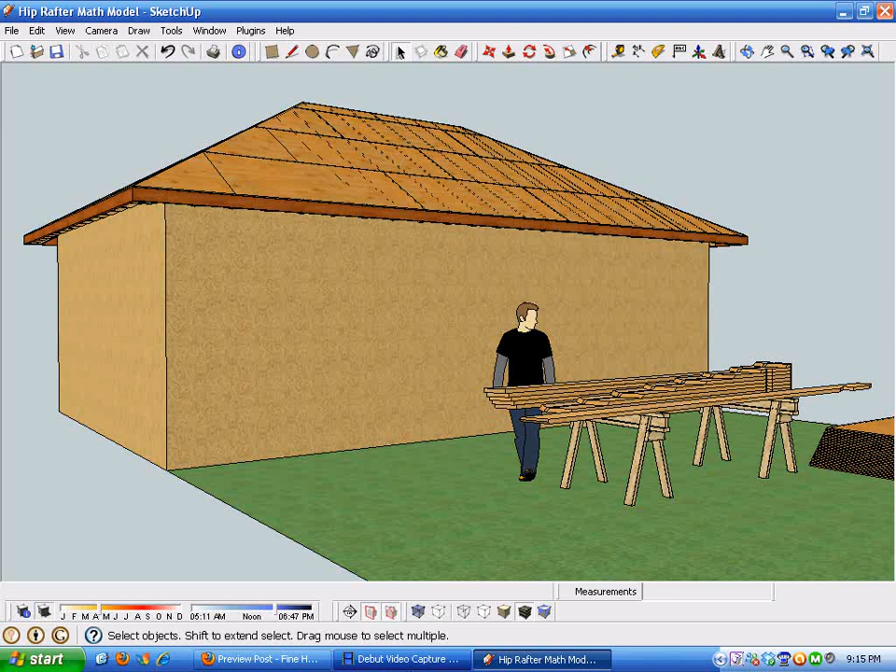In response to viewer interest in my rafter math videos and blog post at finehomebuilding.com on the digital job site, gauged by the view count, and to address a comment on the rafter topic from that video, I developed a three-part video and blog post series to explore hip roof framing a little deeper. I titled the first of the three videos Demystifying Hip Roof Framing with SketchUp, where I'll cover hip rafter geometry in general.

And explain the term 'dropping the hip' in specific. Some of you might have heard that term. If you don't understand it, I'm going to try to explain it. This is a way to visualize it, or maybe clarify it a little bit.

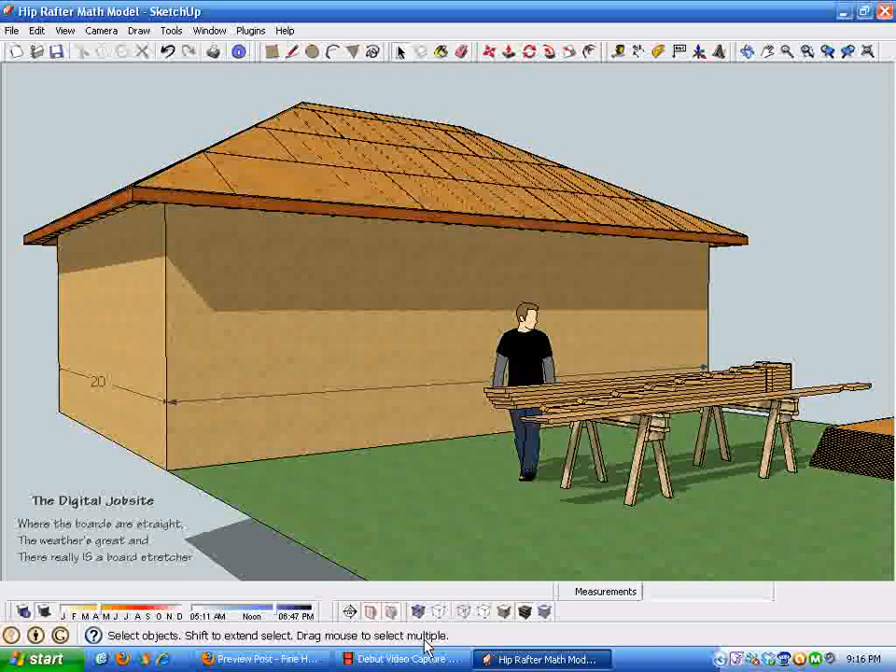To do this, I created the model you're looking at here, which is just a conventional framed hip roof. I drew this in a 7/12 pitch. I'll turn off the shadows as we explore here. And got Bryce standing by a set of sawhorses with components that are used for typical hip roof framing.

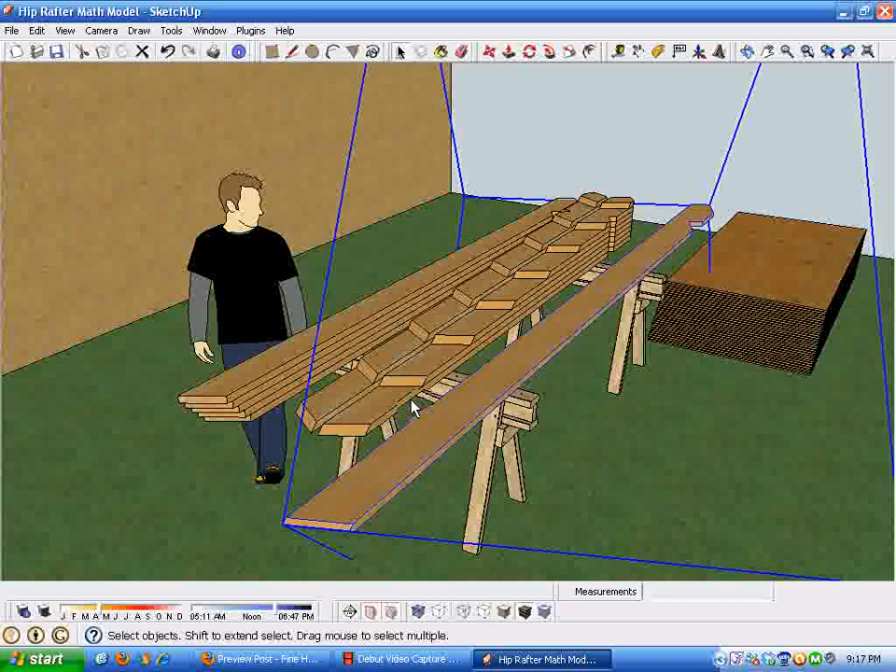In this instance, I've got common rafters, and then two sets of hip jack rafters, a left and a right, and then a hip rafter proper. Then all I did was make copies of the components that I drew to create the roof, and just orbited them around and laid them on the sawhorses. But that's what a hip roof package, part of it, looks like anyways.

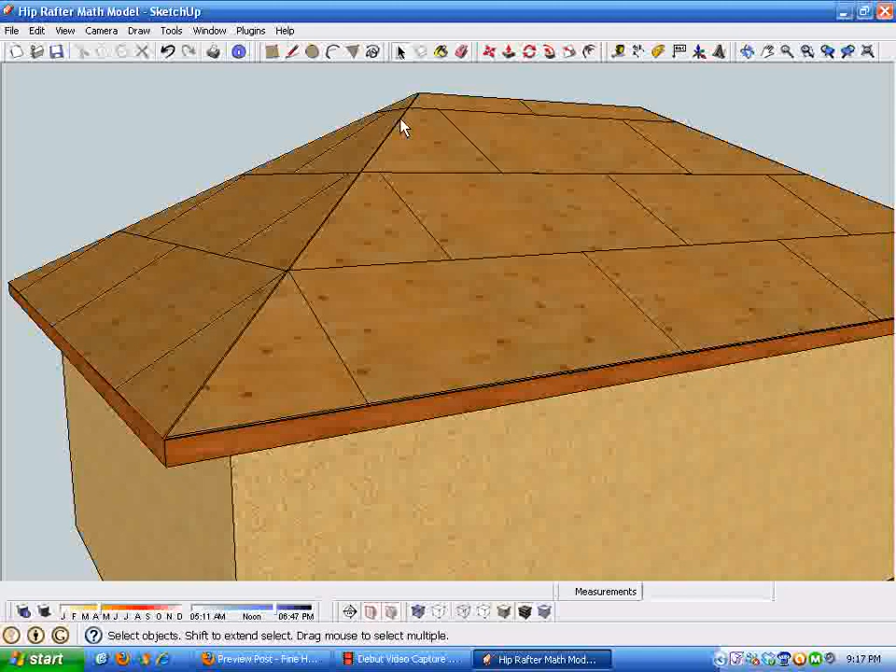So the important thing in my mind when talking about framing a hip roof is to make sure that the roof planes are flat and that they intersect in true straight lines. If you eyeball up the hip here from bottom to top, that's straight as an arrow. Each of the roof planes here are flat.

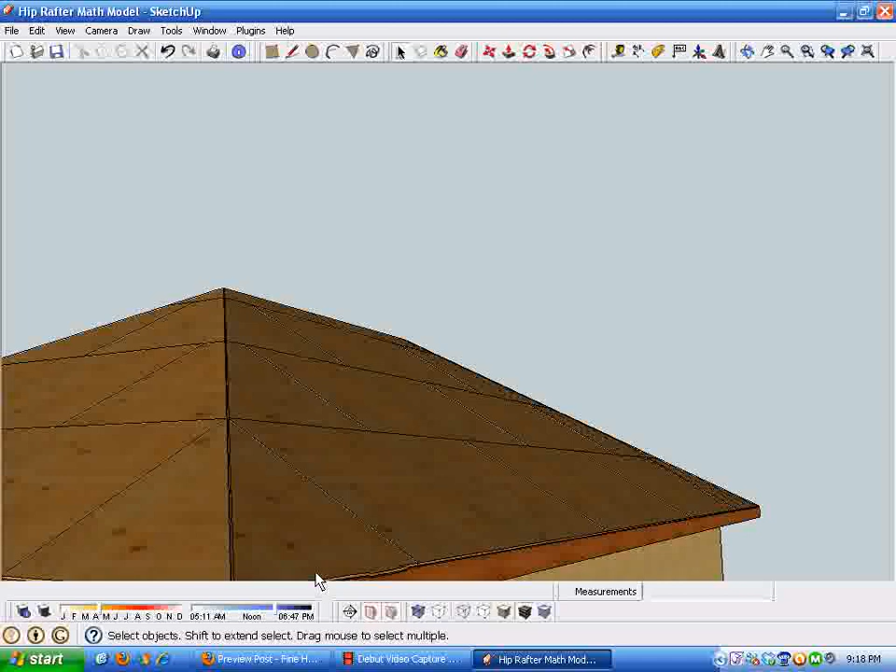Of course, this is a lot easier to do in the digital world at the digital job site than it is in real life, where rafters have crowns in them, and there's some variance there. But the idea is to strive for this flat roof without the hip being bowed up or bowed down anywhere along its length, or at the overhang, or in between.

So that's ultimately the goal of a well-framed hip roof, is to have flat intersecting roof planes that intersect in a straight line. And to peel back this onion a little bit, I set the model up with some layers.

Which I can get to with this layers dialog box. And I grouped this stuff in a couple different areas to be able to layer it on and layer it off and visualize some of the things I'm talking about here.

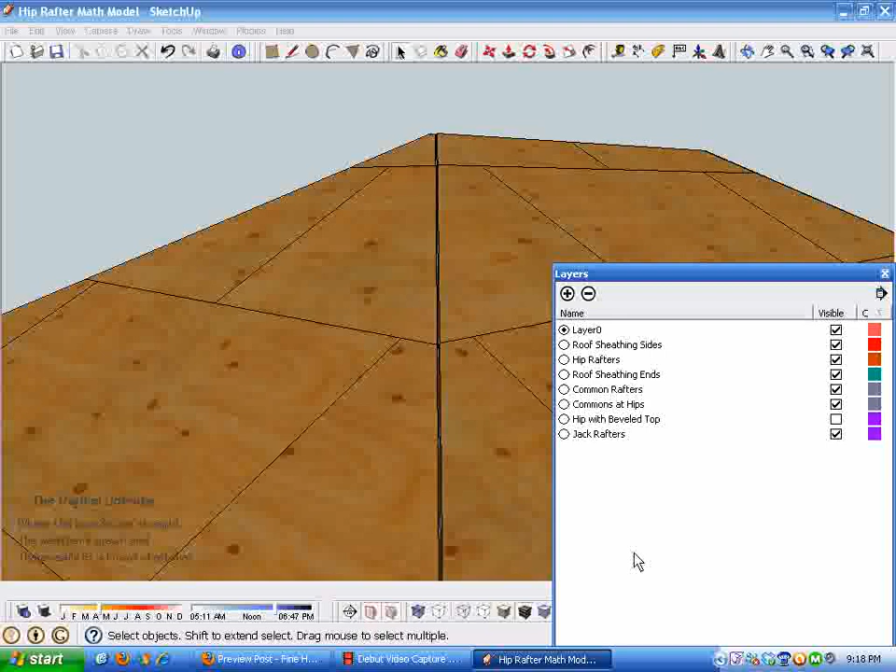So I'm going to hide the roof sheathing at the ends. You can see how that then opens up the roof. There's one common rafter in the middle, and then two sets of hip jack rafters, one on each side of this. And then the jack rafters are tied into the hip.

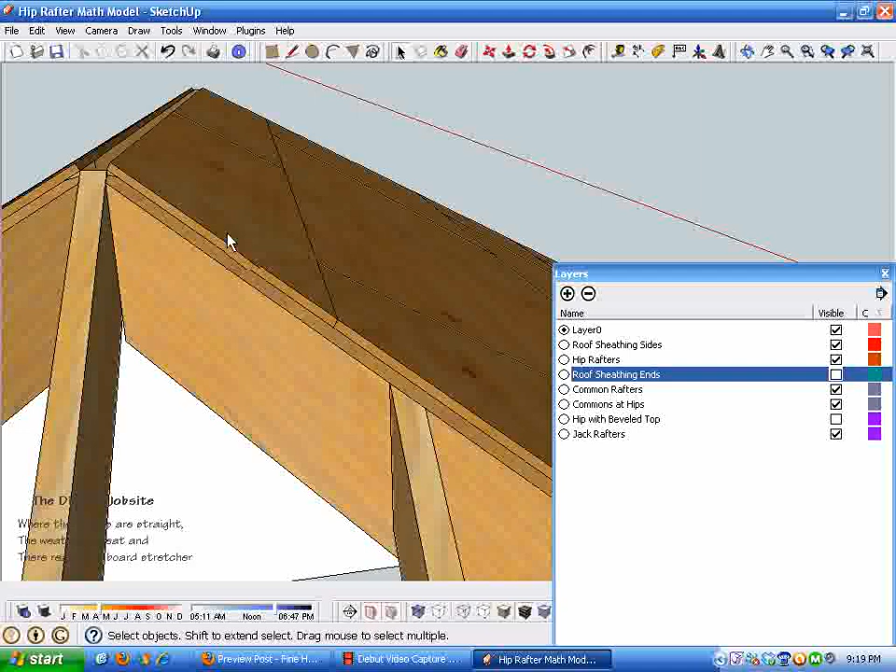And the plywood, I drew the plywood in the model with a 1/2 inch thickness to get the full effect. You can see how the bottom of the plywood is what's laying on the rafters. Let's see if I can orbit around underneath here. Bottom of the plywood's laying on the rafters, and it lays on one edge of the hip.

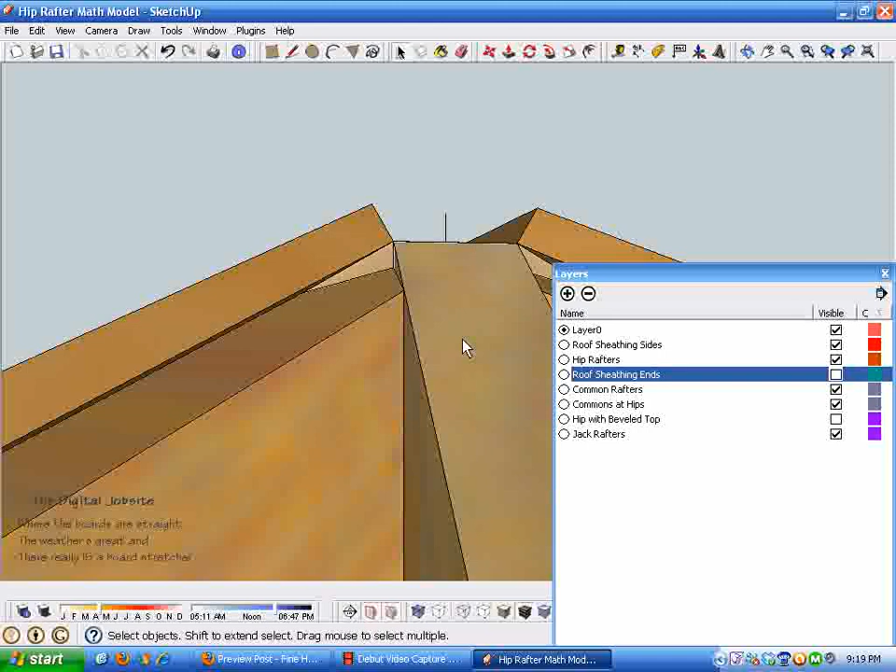If you zoom in here, you can see how the hip rafter is flat and the plywood is supported right here by the edge of the hip rafter. So it's that edge of the hip that needs to be coplanar with the top surfaces of the common and jack rafters. That's getting into a little bit of detail there.

But to go a little further into this, I'll hide the sheathing on the sides. And now you can see, hide this dialog box, the rafters are all coplanar with each other, the top surface of the rafter and this corner of the hip. I'll try to explain that a little further to understand it.

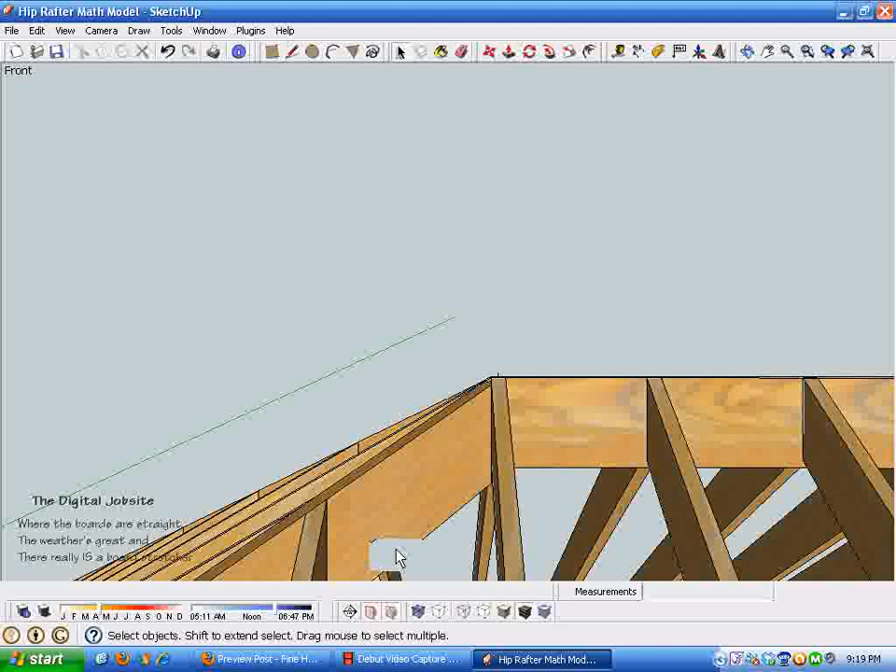The same thing with the end of the roof. It's all in one plane. It all disappears at the same instant. You can tell it's flat. So that's a perfectly framed roof.

Of course, every piece here is precisely the same size. They're all straight as an arrow, unlike the lumber you'll get at the lumber yard. But this is what we're aiming for.

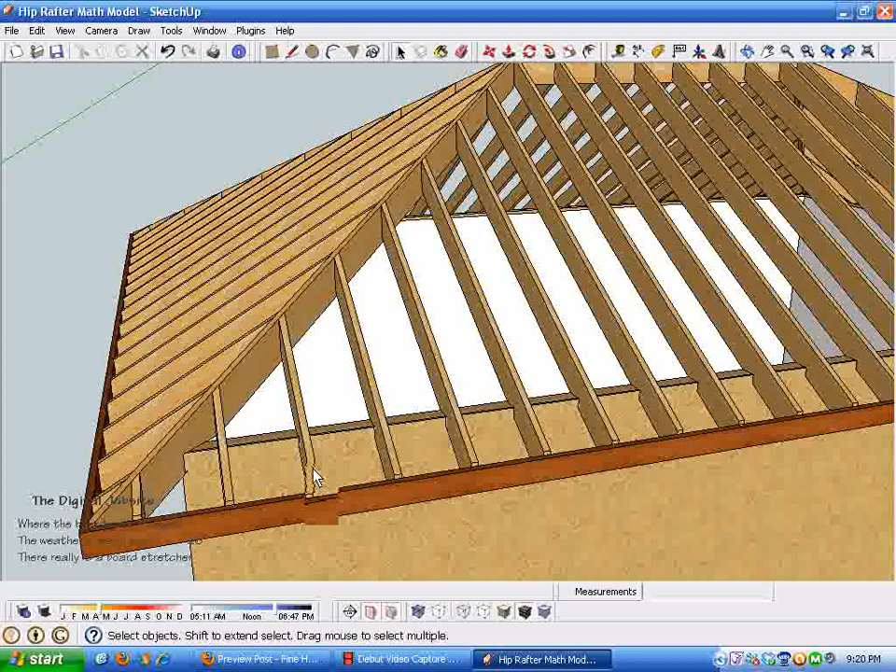And when you do math for calculating hips and jacks, they're all calculated on a straight line.

Anyways, the next thing I want to do is show how the underside of the sheathing would look, and how these hips ideally will support those flat intersecting planes.

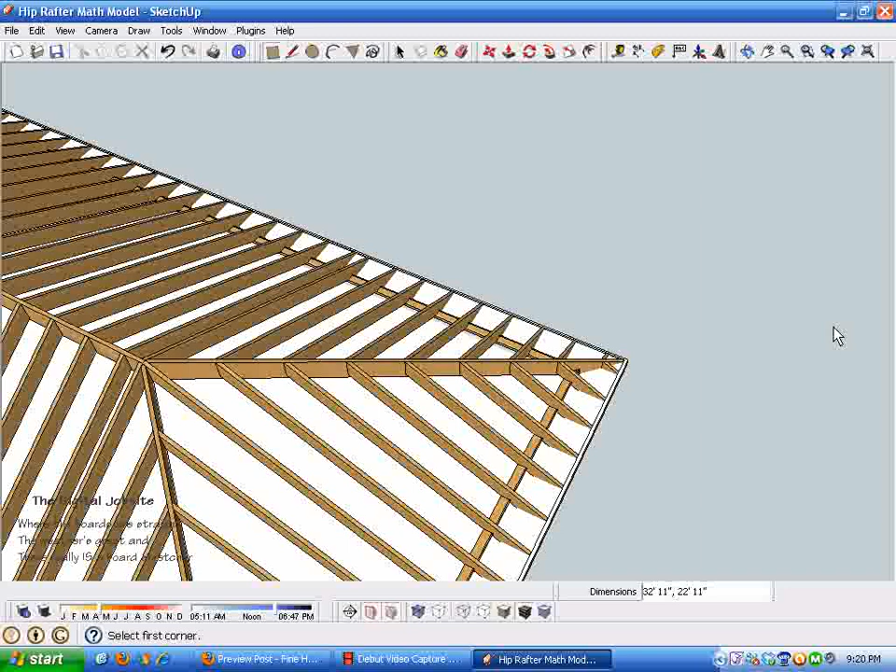So I'm just going to draw a rectangle here using the top of this fascia as a guide. Because I've grouped this geometry by putting it in a group or making it a component, I can select that rectangle I just drew and move it outside to work on it a little bit.

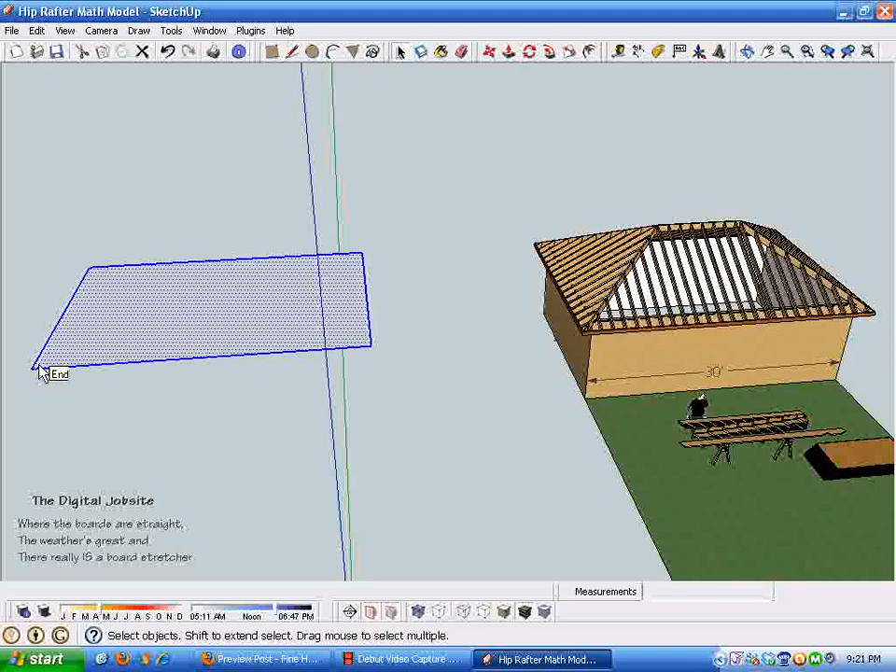You can see I'm moving it in the red axis there by the little dotted red line, and I'm just going to move it an even 55 feet. When we slide it back, we'll slide it over 55 feet and it'll go right back where we want it, to demonstrate and visualize what I'm trying to explain.

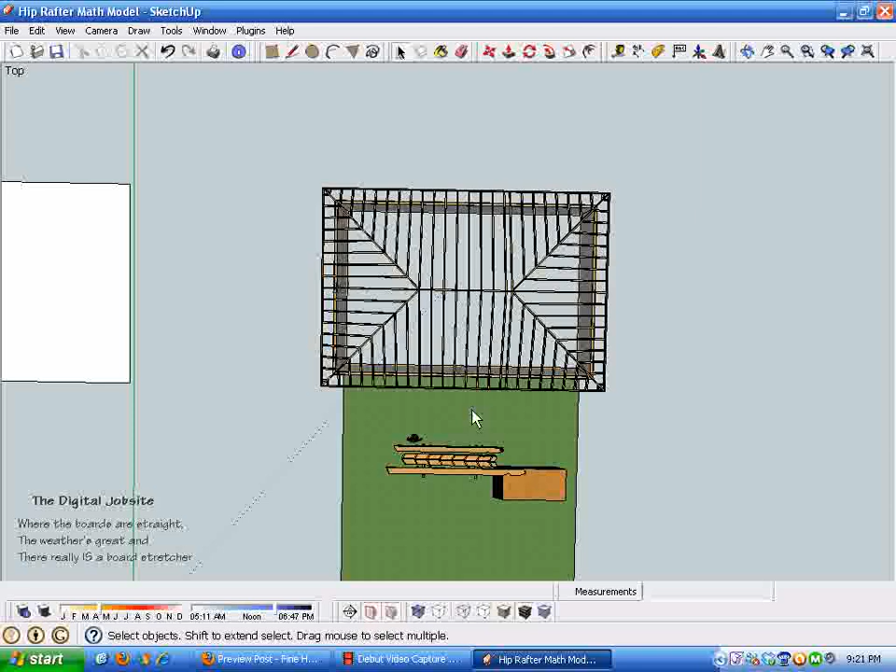So if you look at a hip rafter or hip roof from straight up above, you can see that the ridge and two pieces of fascia are parallel, and the hips run at 45-degree angles. That's assuming the slope of the roof is the same all the way around, which I did in this case. Sometimes the hips are framed at a different angle for architectural effect, but for this video they're all the same. I framed this up at a 7/12 pitch.

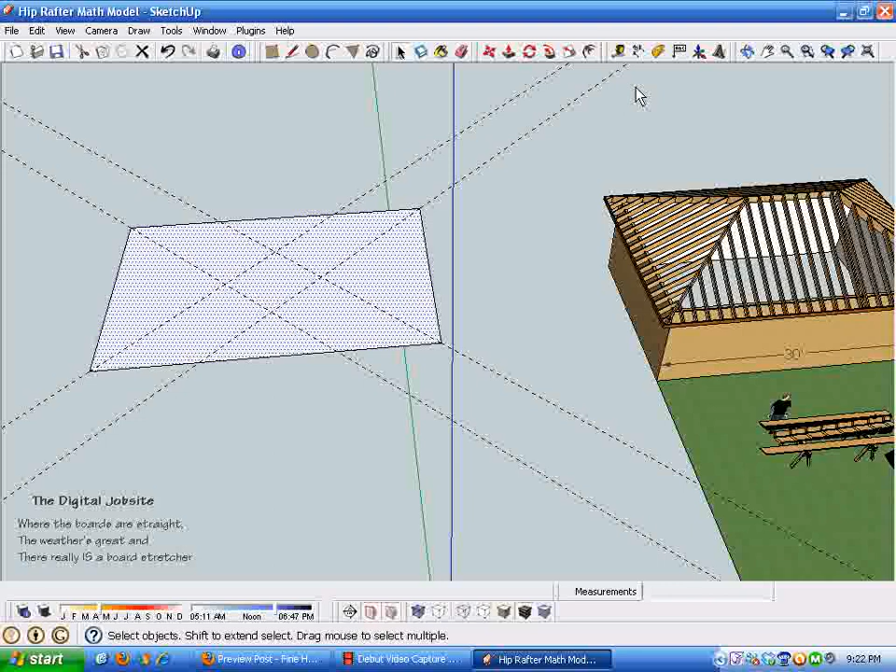So I'm going to use this surface over here to work on the explanation of what I'm going after here. Like I said, the hips are all oriented at a 45-degree angle from the sides and ends of the building, so I'm just going to draw these guidelines in with the protractor tool.

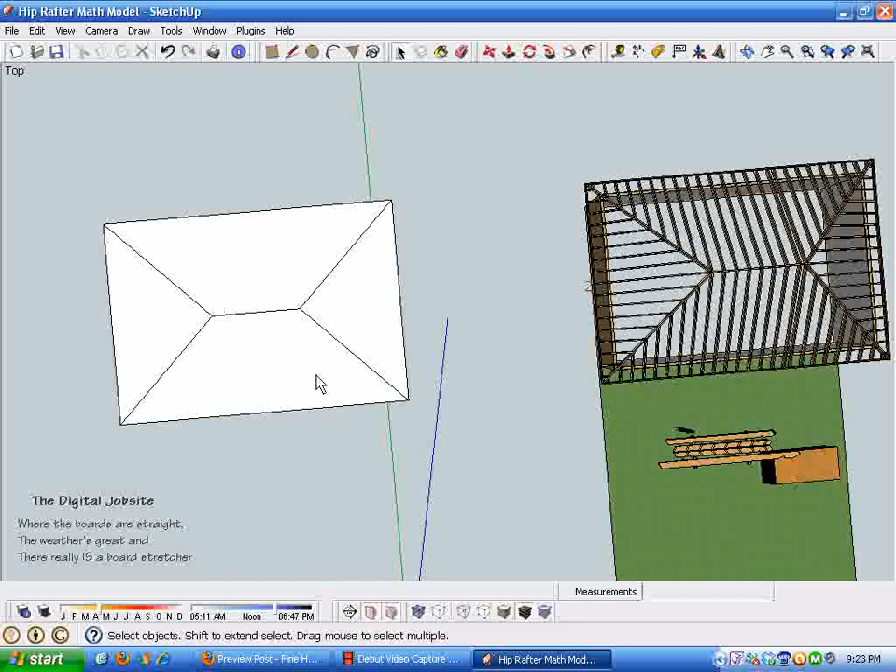This will give you a better idea of how hip roof geometry is set up. So I've got those guidelines, and by drawing some other lines in here we'll create this piece of geometry for explanation purposes. What I've done is traced those guidelines, and in essence, when you look at this flat plane and the roof itself, they look the same looking straight down at them.

And we'll want to pull this up into 3 dimensions. I'll show you how to do that — a slick little way to do it. First thing I'm going to do is create a guideline with the slope of the roof.

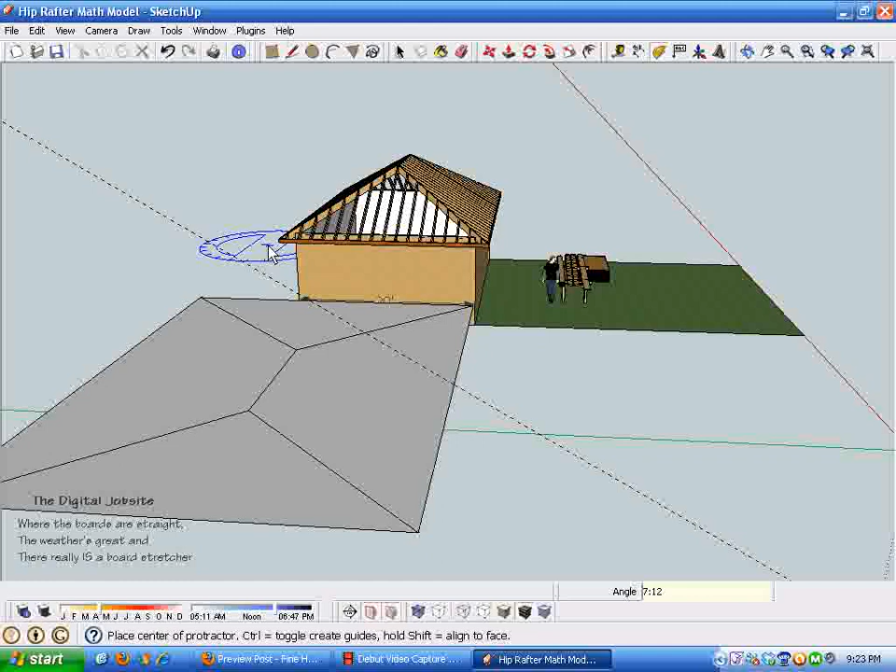I'm indexing this on the side of the building, bringing it to the midpoint of this line, which I know when it turns that blue circle. I'm just going to rotate a line up and put it at a 7/12 pitch by typing in 7:12, enter. That gives a 7/12 pitch guideline.

Then I'm going to select this middle line and the move tool. When I do that, you can see Alt equals toggle auto-fold down here. So I've got that line selected. I'm going to hold down Alt, Shift, and the up arrow key and grab this line by the center, which is a blue circle, and when I lift it up I want to index it on that line.

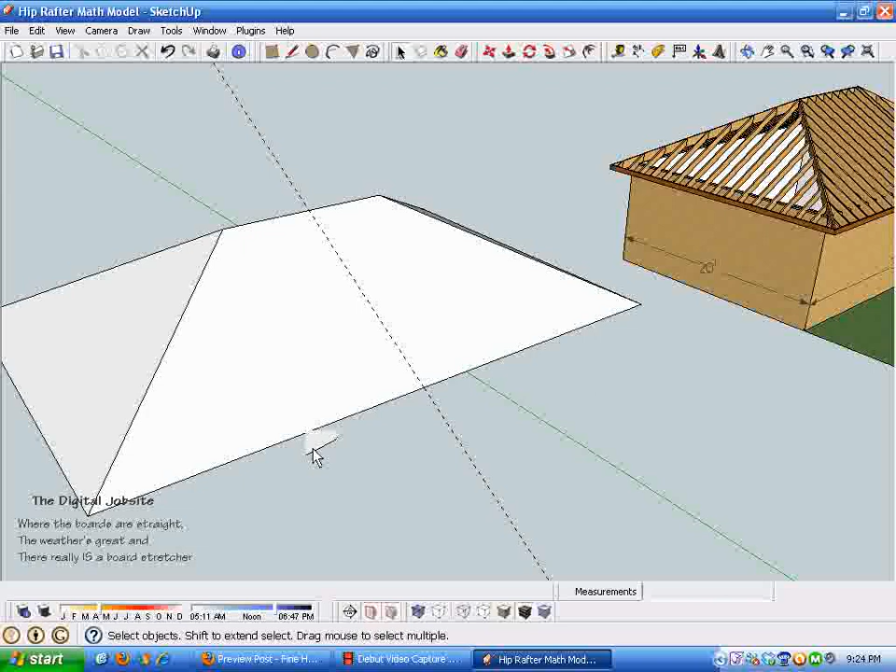I guess I missed grabbing it exactly where I wanted to. There we go — Alt, Shift, up arrow, holding this at the middle. I just want to click it up until it intersects that line. By doing that, you can see I've created this hip roof plane structure, and this is ultimately what we're ending up with for this hip roof framing. I hope this will all make sense as I develop this a bit more.

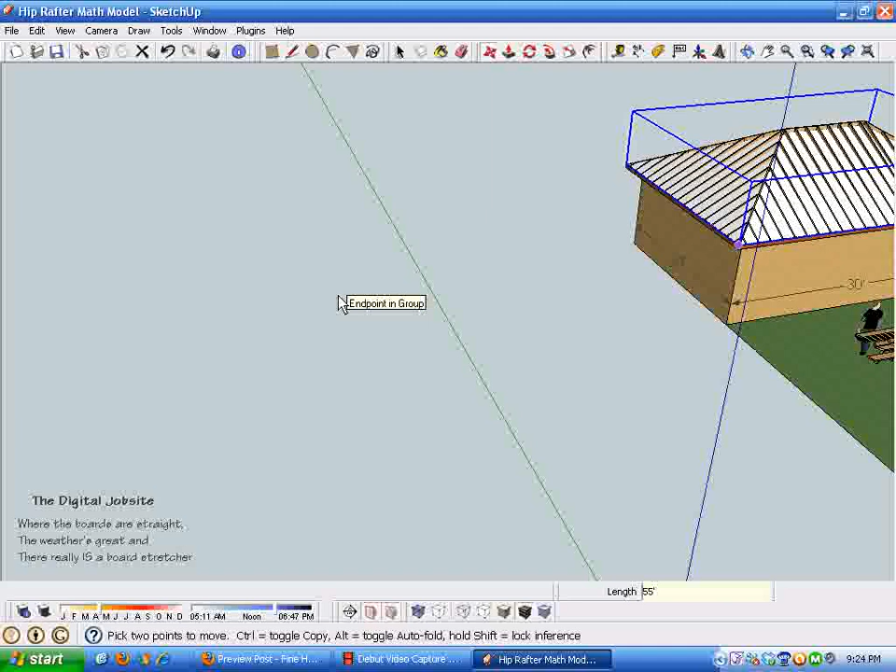So I'm going to group this geometry to keep it all together, and then we're going to slide it back over by grabbing a corner, getting it going in the red direction, and typing 55 feet, enter. Then if I did all that right... it looks like I must have missed something, because these planes aren't lining up with the top of the roof like I wanted them to.

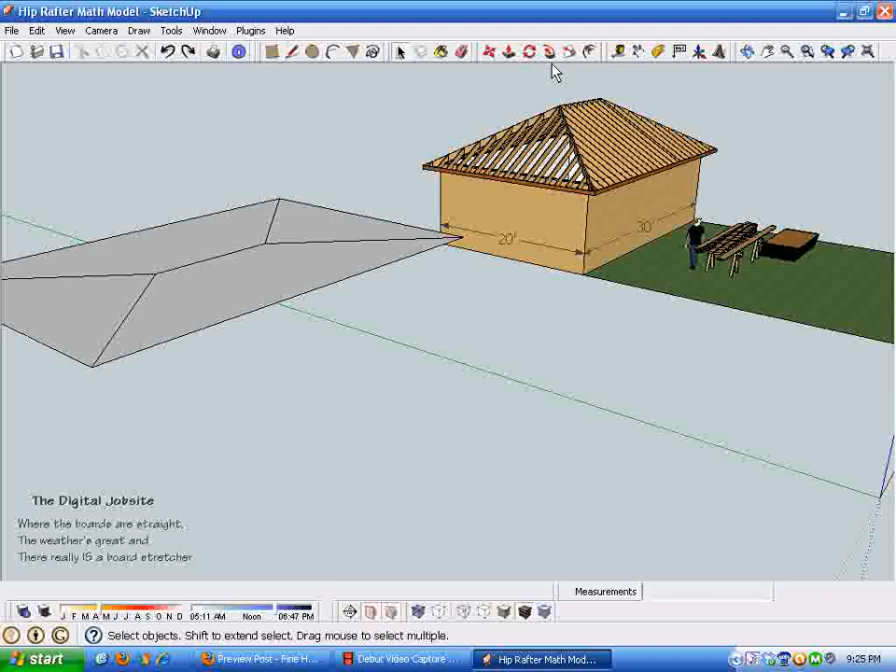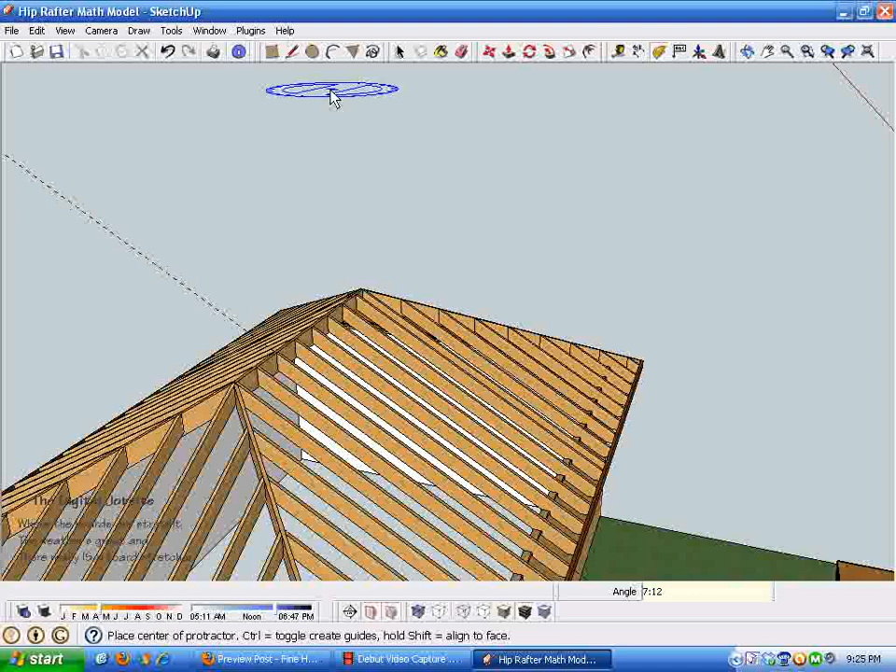So I've got to back this up. I'm wondering if I got my guideline in at the right slope, so we're just going to go over here and double check — starting it horizontal here in the green direction. There, it's trying to snap to green. I'm going to go 7, 12. Yep, so those rafters are in the right slope.

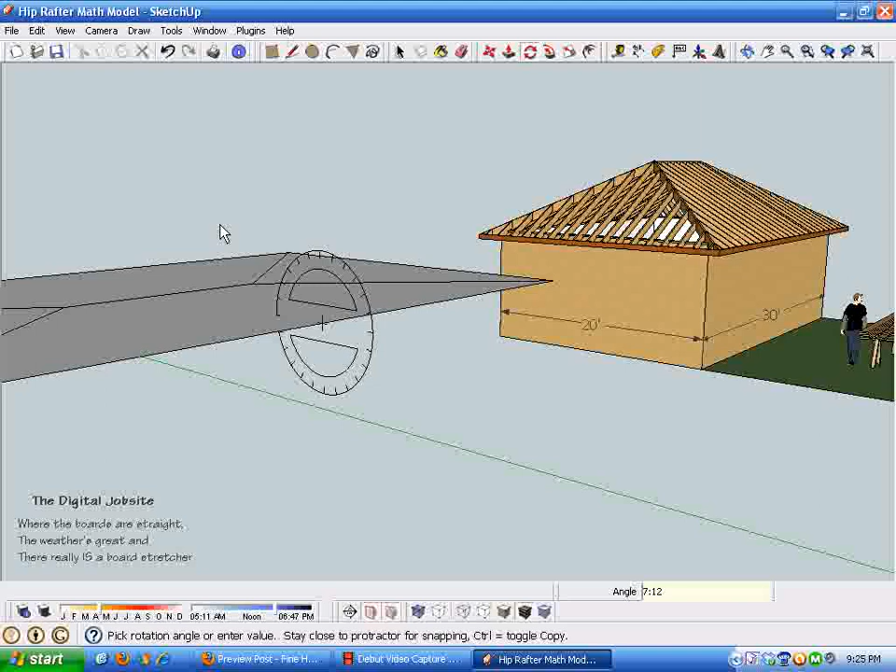I must have got something a little funny on this other side. So I'm going to go back through those steps, get this protractor to line up in the middle of the line, pivot it up, 7, 12. If I grab the move tool, I'm not going to get anywhere. Oh, there's part of my mistake — it jumped off that center point before I got the protractor going.

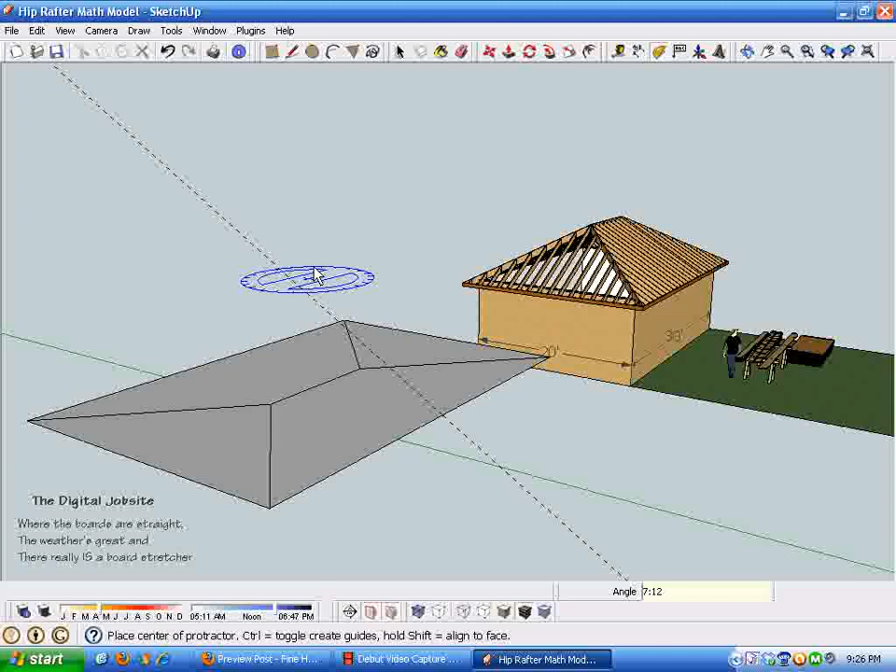Okay, this one's for the money — 7/12 pitch. Okay, now I'm going to grab this line, select the line, the move tool, Alt Shift up arrow, grab the line by the middle and pull it up to the line.

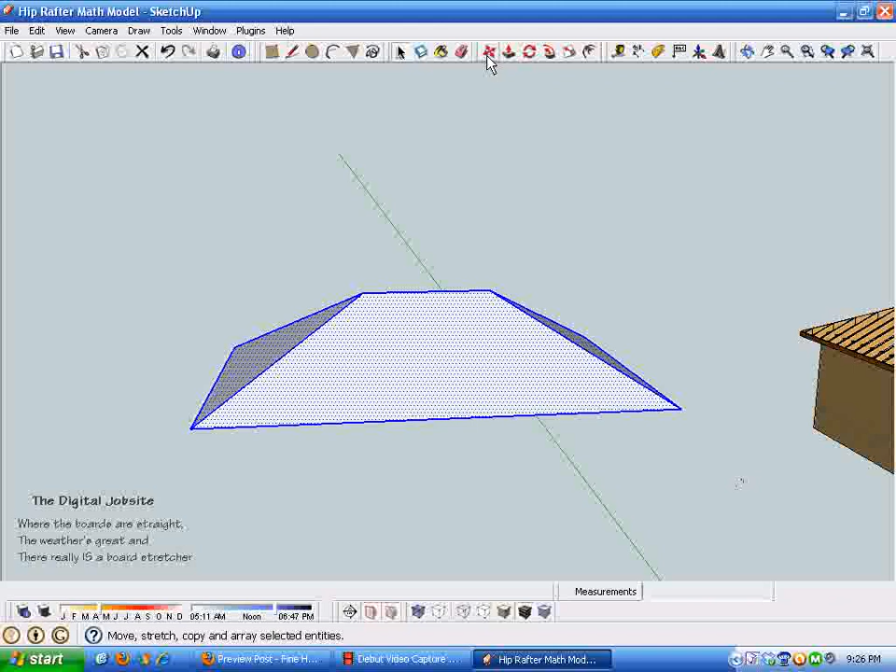And we've intersected the guideline. Sorry about double doing all these steps, it's just part of the SketchUp process. There are little technicalities - if you don't get them quite right, it'll let you know. So I'm just going to slide this back over 55 feet.

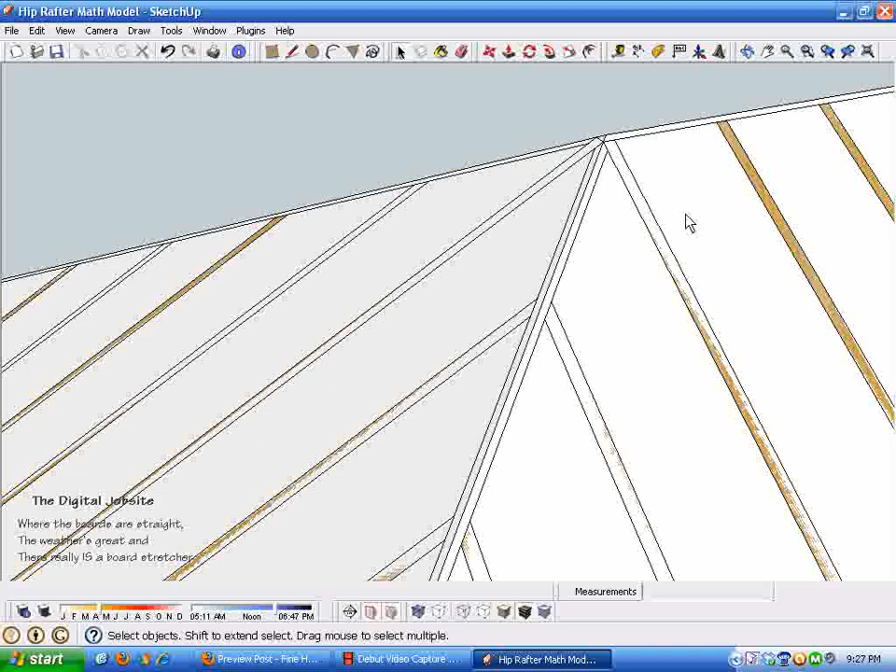There we go, that's what I was trying for last time. Sorry about all the doing and redoing. But what you can see by the Z-fighting here is that all the surfaces of the rafters are in the same plane as these flat surfaces of this little grouped geometry we created here. And you'll notice that this line, or these two lines, are the corners of the hip rafter.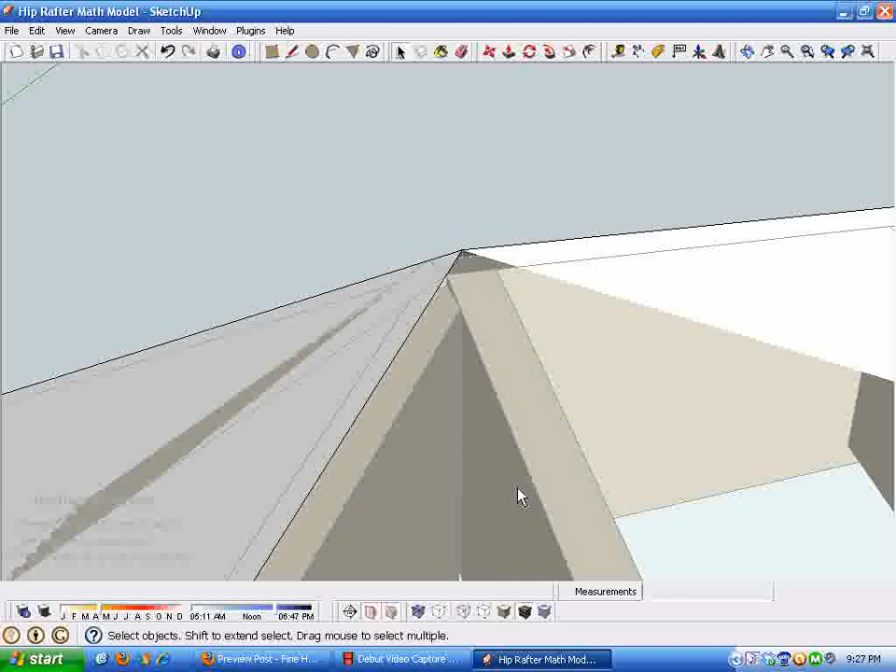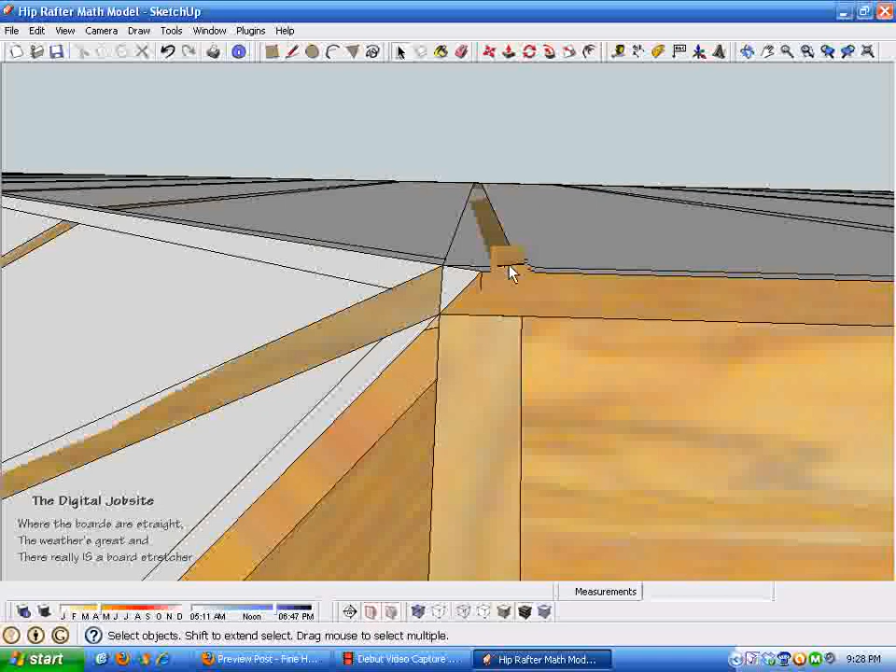If I go in and get into this group and delete one of the faces, then you can see - come back out here - something's behaving a little strangely there. I don't know why this whole thing isn't in one plane. Anyways, I'm going to delete those faces, and you can see how the actual planes hover above the ridge at the center and above the hip at the center.

So when you're creating a hip rafter, all the jacks and the edges of the hips and the edges of the ridge all have to be in the same plane. That kind of demonstrates it a little bit. So I'm just going to select that group and hide it - we may want to look at it again in the future.

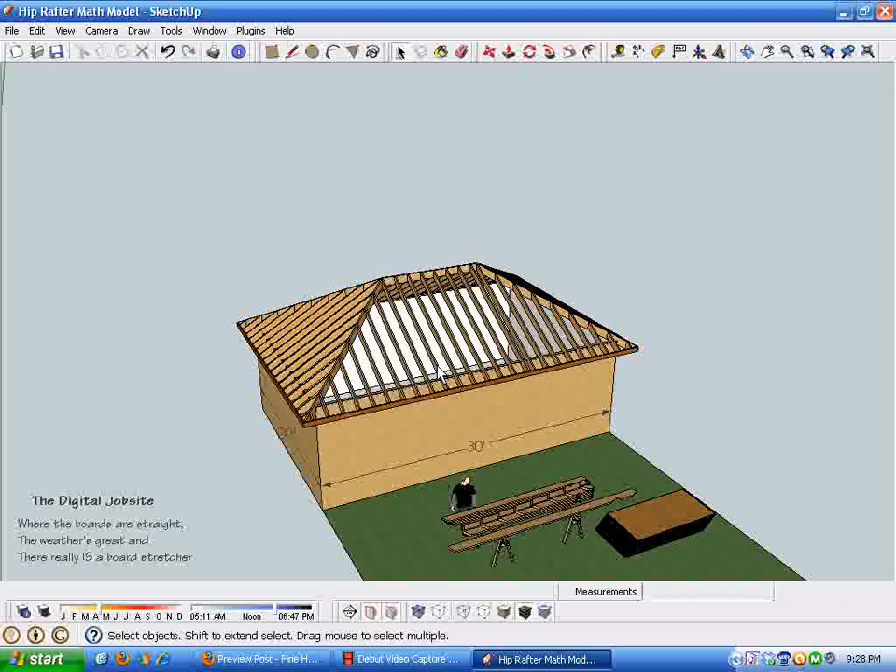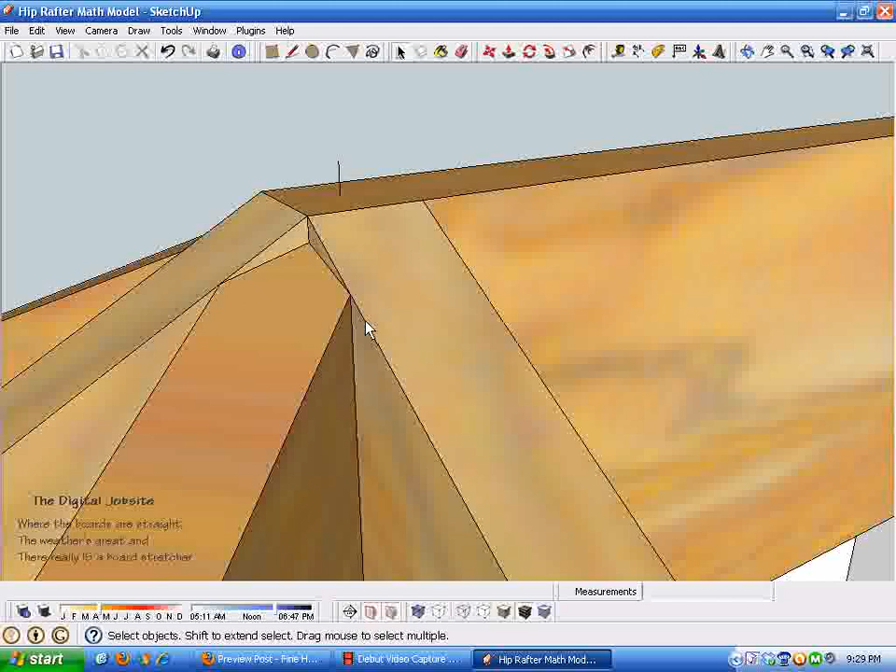What I was trying to show there is when you're framing a hip rafter, typically you're using dimensional lumber, which has flat sides and isn't peaked the same way the flat planes have to intersect. So the edge of the hip rafter is going to meet at the edges of these common rafters. And one of the things that's confusing about the hip rafter is when you're installing it, sometimes you want to make this point line up with the top of the ridge.

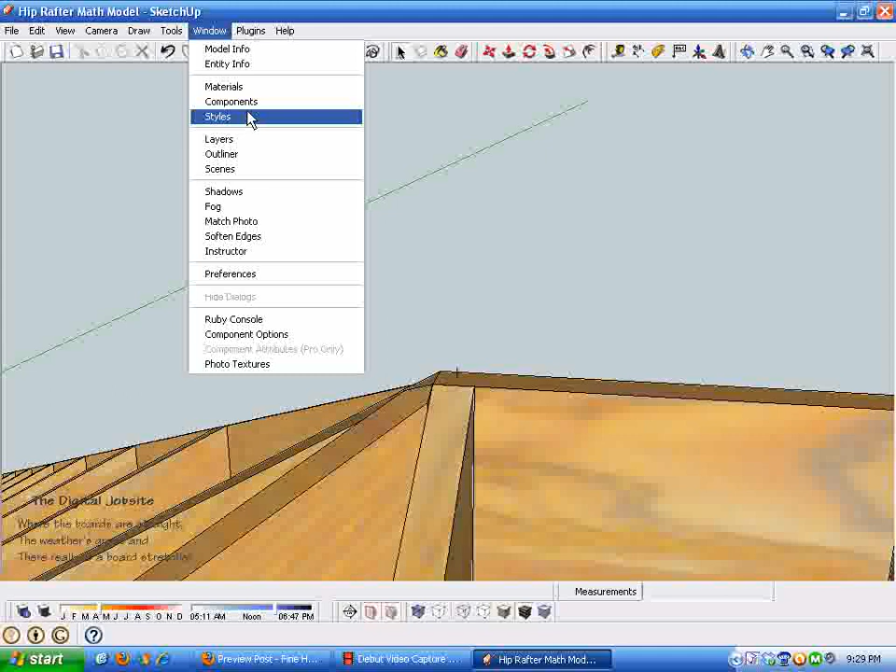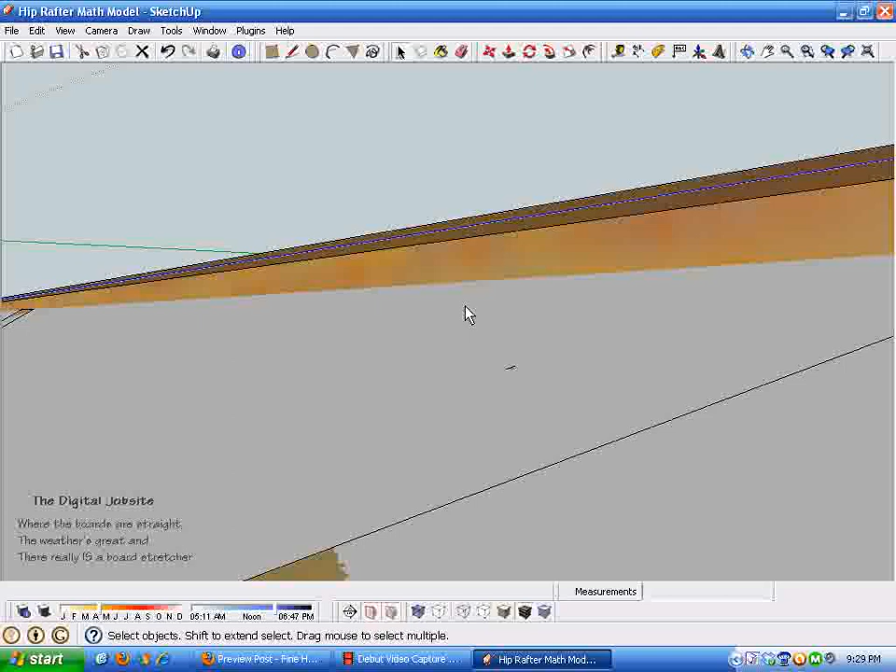And if you do that - we go to View, Hidden Geometry, and unhide this group here - you can see that the hip rafter would stick up through the roof, or it would make the plywood bend up at the hips, so that hip is dropped. The alternative to dropping the hip is beveling the top of the hip. So if you cut these little edges of wood off and bevel them to the center of the hip rafter, then you wouldn't have to drop it.

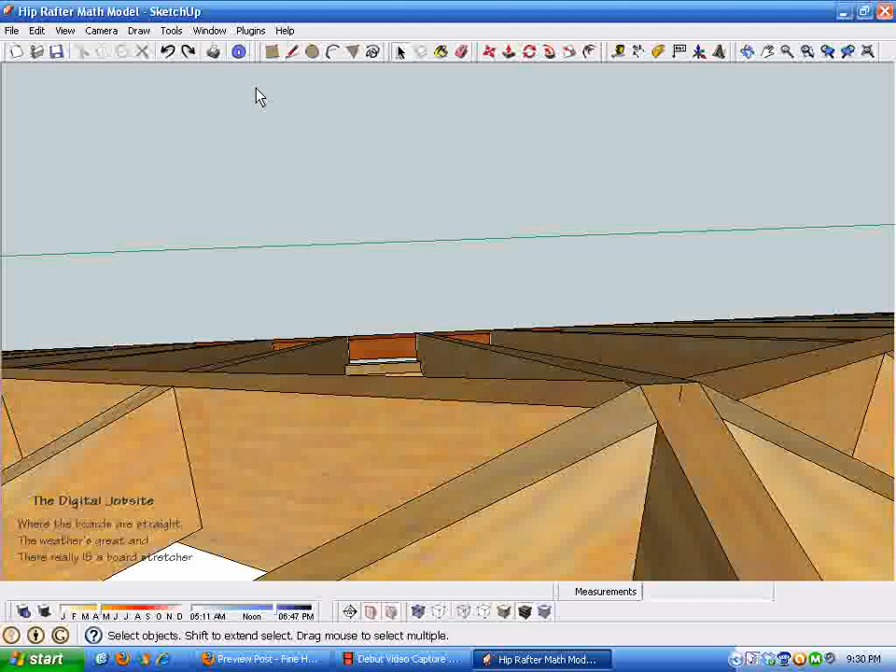But that's a lot of work to rip the top of those hips at an angle. So another way I wanted to demonstrate this was to show you what a perfect hip rafter would look like. So I created that, a hip rafter. I'm going to hide these hip rafters, which are the ones you typically cut, and then open up a hip rafter with a beveled top.

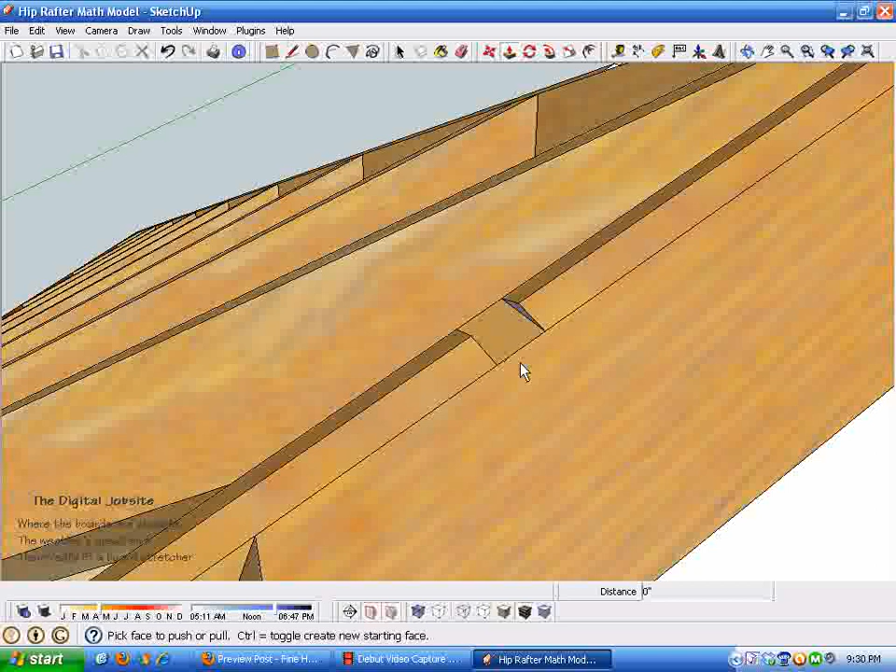So what I did was create hip rafters that have a little triangular bevel worked onto the top of them. You can see I put it here on the rafter, and if I go to edit this and move this little triangle up towards the top, you can see the function of dropping the hip. If you don't bevel the top of it, the hip sticks up too high. If you bevel the top, you can fit all these surfaces flush, but it's a lot simpler just to drop the hip and accomplish the same thing.

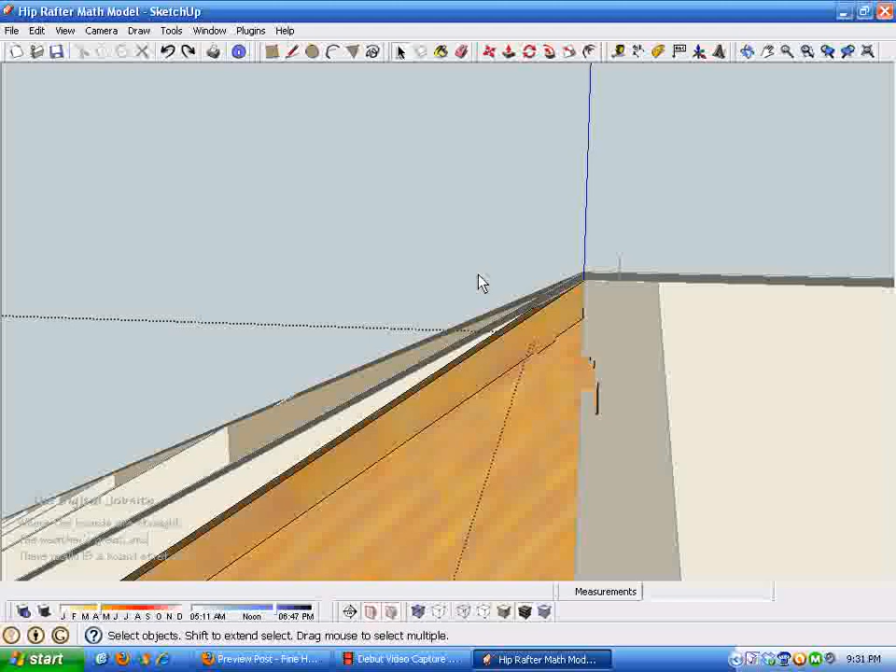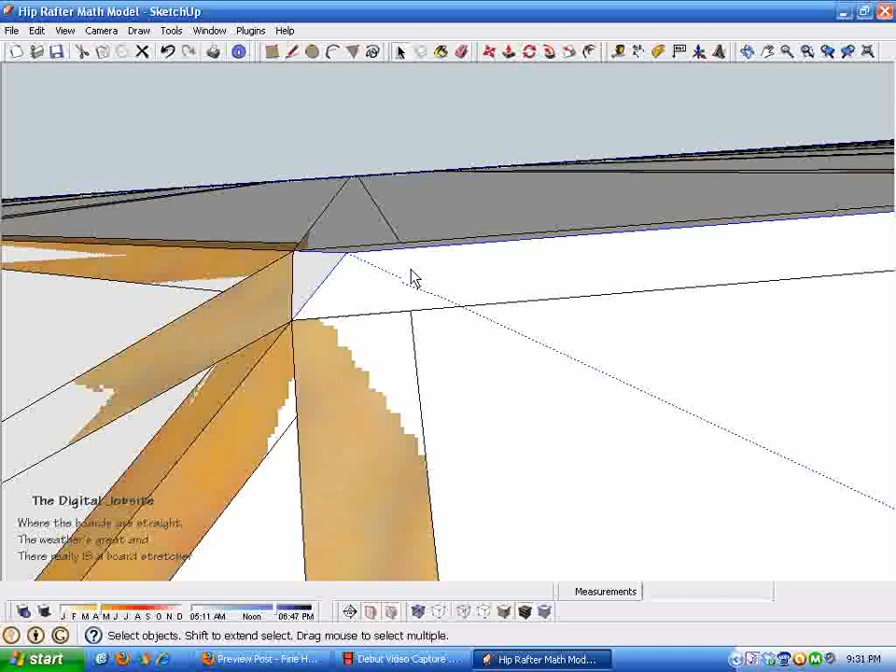If we go in now and view the hidden geometry and unhide this - I guess I should have put that as a layer also - now you can see that these beveled surfaces of the hip rafter are Z-fighting as well, which means they're in the same plane. What I didn't do is bevel the hip off the end of the ridge itself, otherwise those surfaces would be flashing as well. So I'll just show this for anybody that hasn't worked with layers.

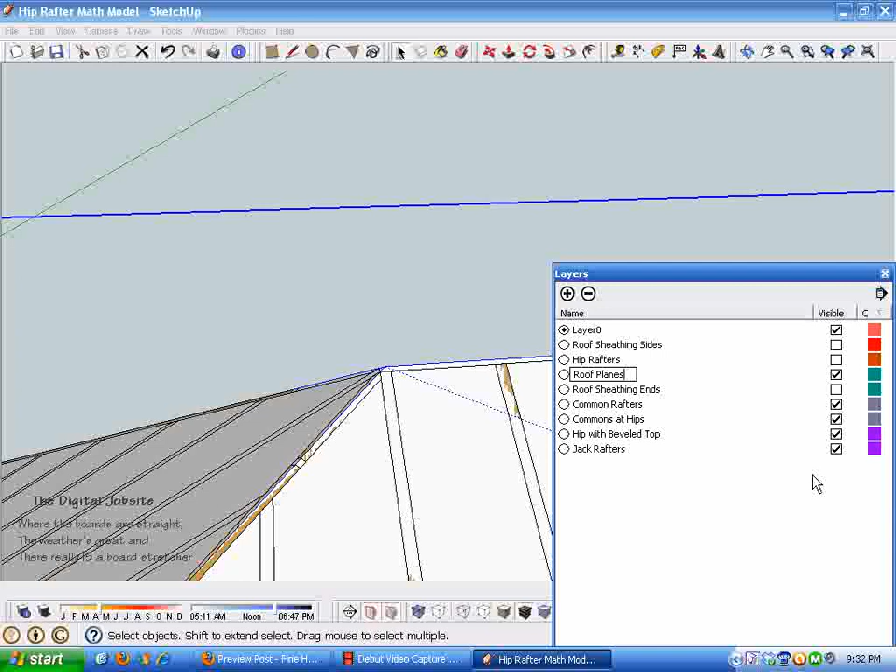I don't do it a lot, but they're pretty handy to have. So I'm just going to go up here to Window, Layers, hit the little plus sign. It gives me a dialog box, and I'm going to just call that Roof Planes - that's the name of our new layer there. Now by right-clicking that group, I'm going to put this in the Roof Planes layer and close that. So now when I hide the roof planes, that disappears, and it shows.

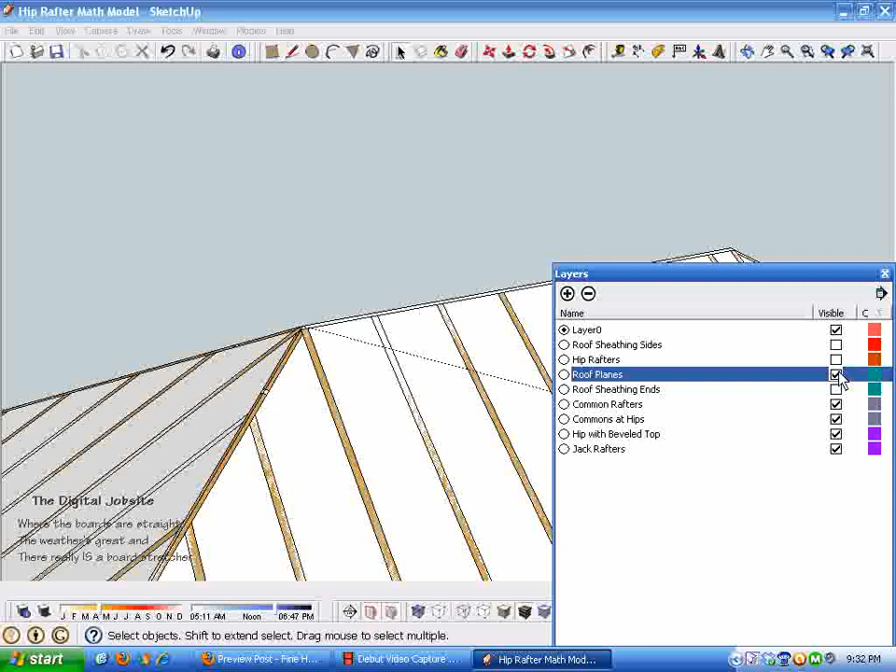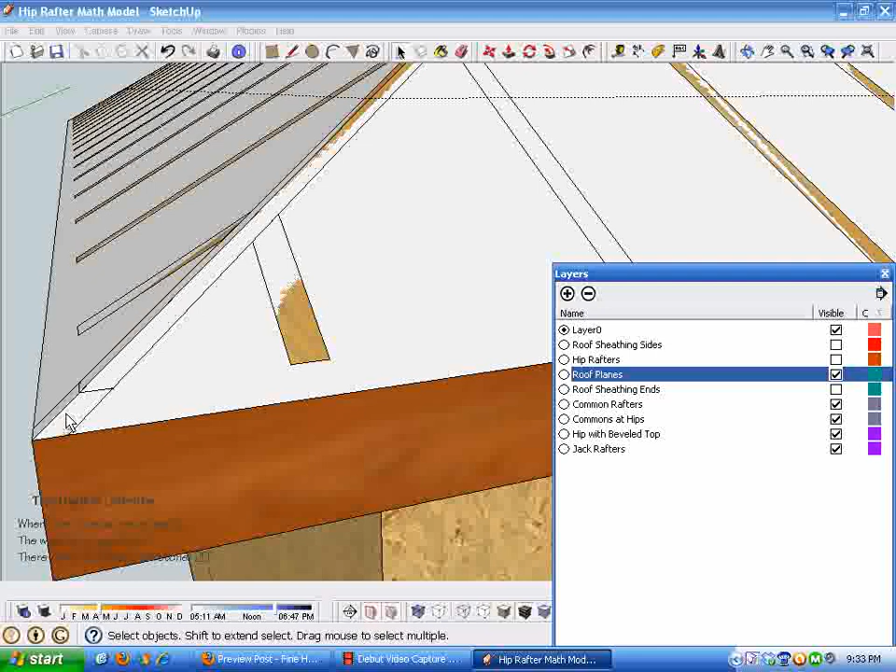This is quicker than going to hide and unhide if you plan on manipulating geometry like that - it's nice to have it set up this way. The other thing I did with this ideal hip rafter with the beveled top is I extended the tail at the end so the surfaces come all the way down to the fascia. Go back in here with the layers, go to Roof Planes - you can see how that rafter supports this roof plane. With half-inch thick plywood it's not necessary because it won't bend, but this shows you how the geometry is set up.

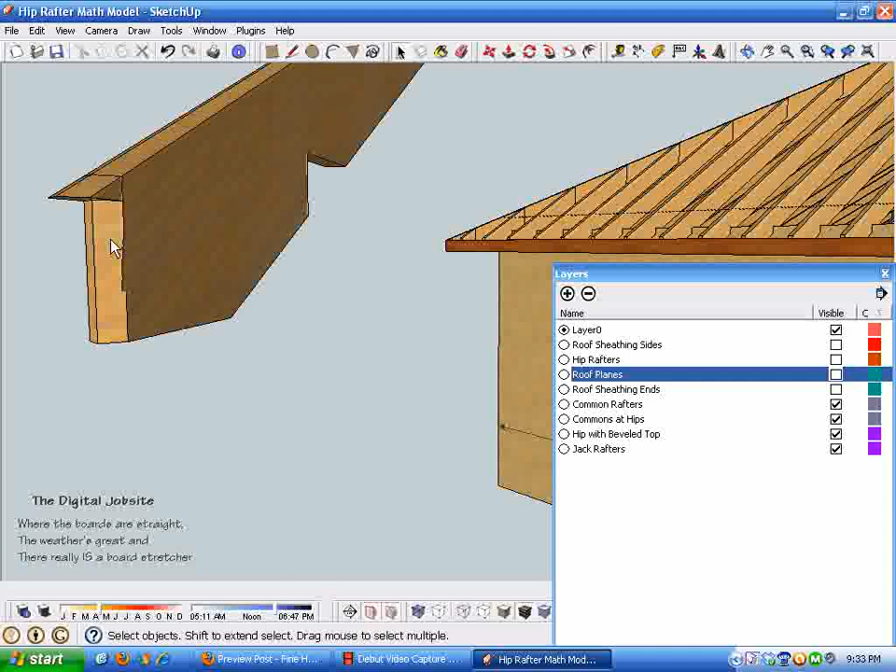If I take this hip rafter, hit control, I'll move a copy of it out here in space, and we can examine further what I did. This is what a very thorough, complete hip rafter would look like. It would have this little notch tail. Of course, it'd be senseless to go to all the trouble of cutting all these extra surfaces. They wouldn't do any good, but that's all part of the geometry of a hip rafter.

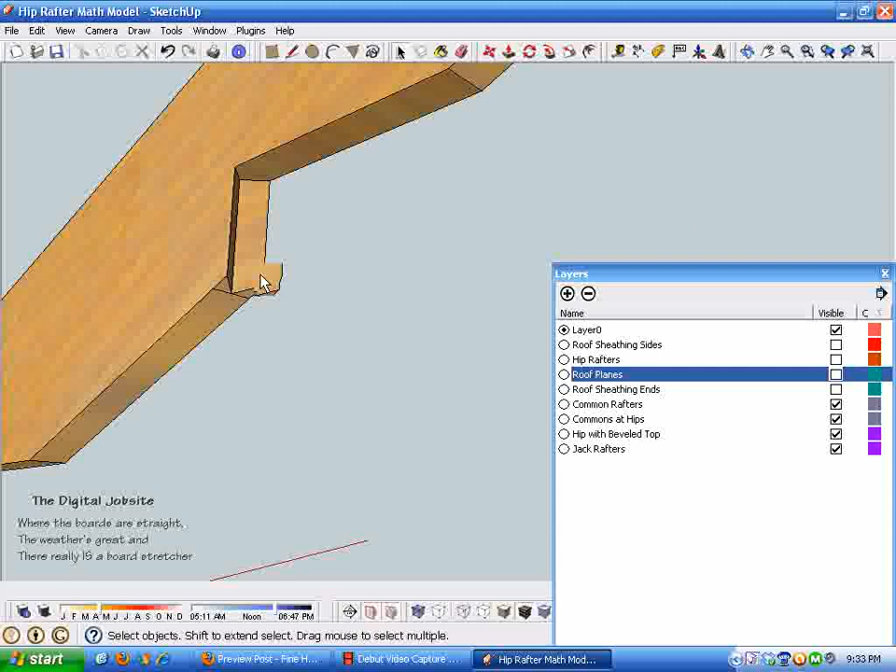The other thing about a hip rafter, which will show up in other parts of the video, is a notch at the bottom here, which would fit around the corner of the building. I'll zoom in and show that in a bit. Got lost in my model, so I'm going to hit zoom extents.

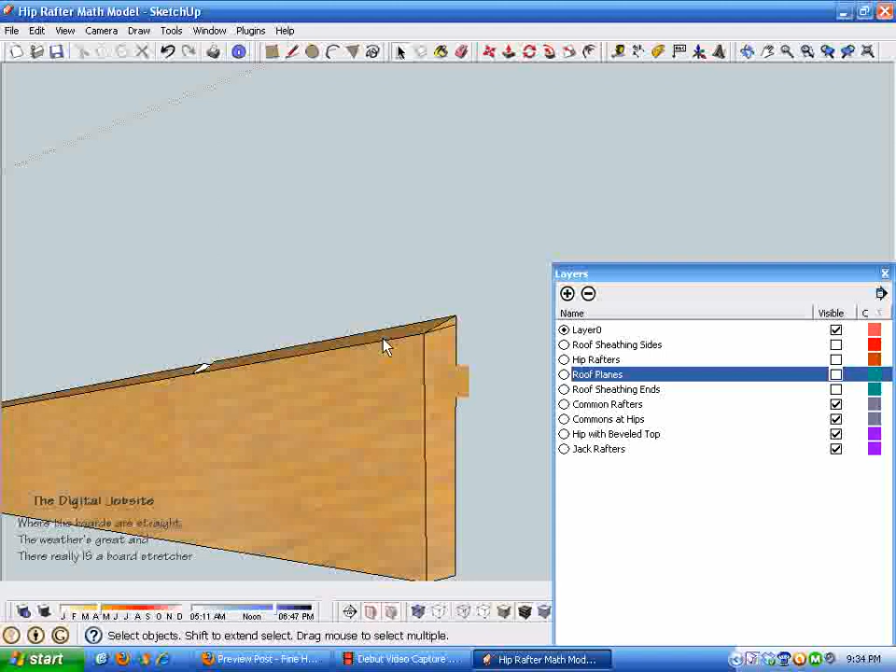If we go back up to the top of the hip, you can see how in this bevel top hip, it's got this little extra piece of wood on there for the perfect hip. But you can see the amount of time it would take to bevel all these surfaces and make all the notches. It's kind of senseless to do all that.

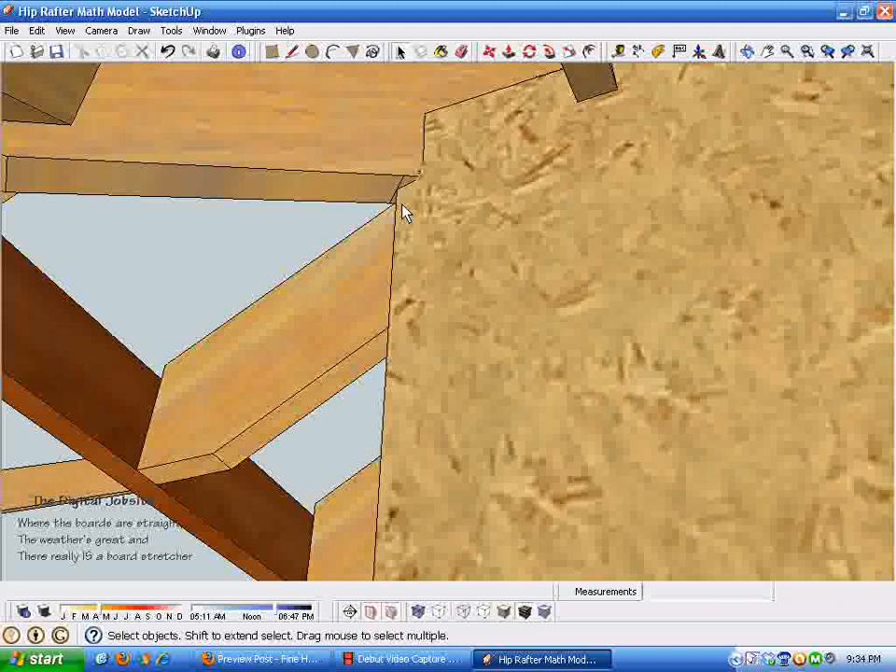I'm going to show you one more thing on this rafter. If you look where the hip rafter intersects the wall, I'll try to zoom in here without making you too dizzy. You can see how in a perfectly cut hip rafter it would fit to the sheathing on the corner of the building.

Of course, when you're cutting a hip rafter, you just lop this off square, which shows up if I hide the hip rafters with the beveled tops and put the regular hip rafters in there. I guess I got these two little pieces of geometry—they need to be part of the other hip rafter. Shut off the hidden geometry.

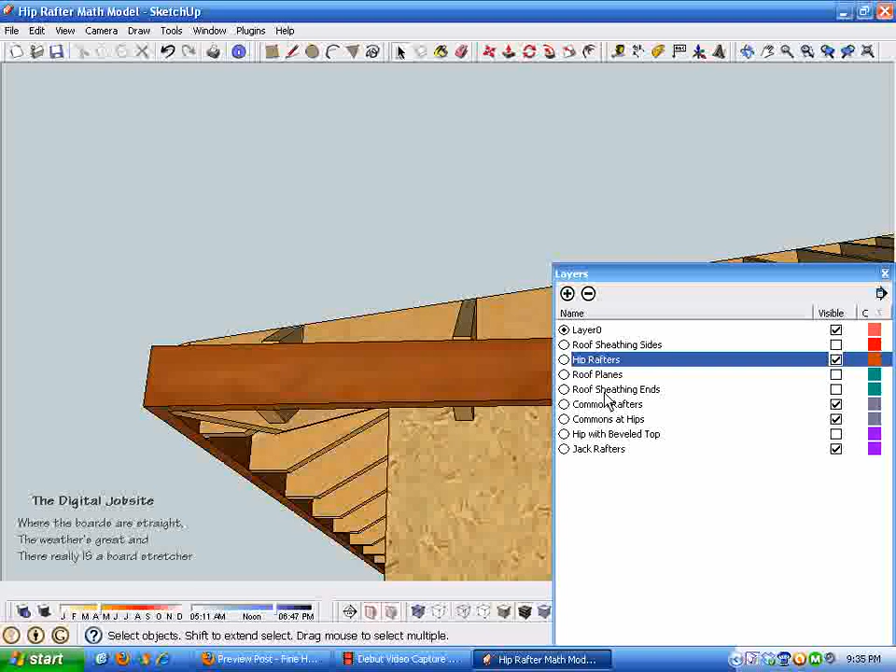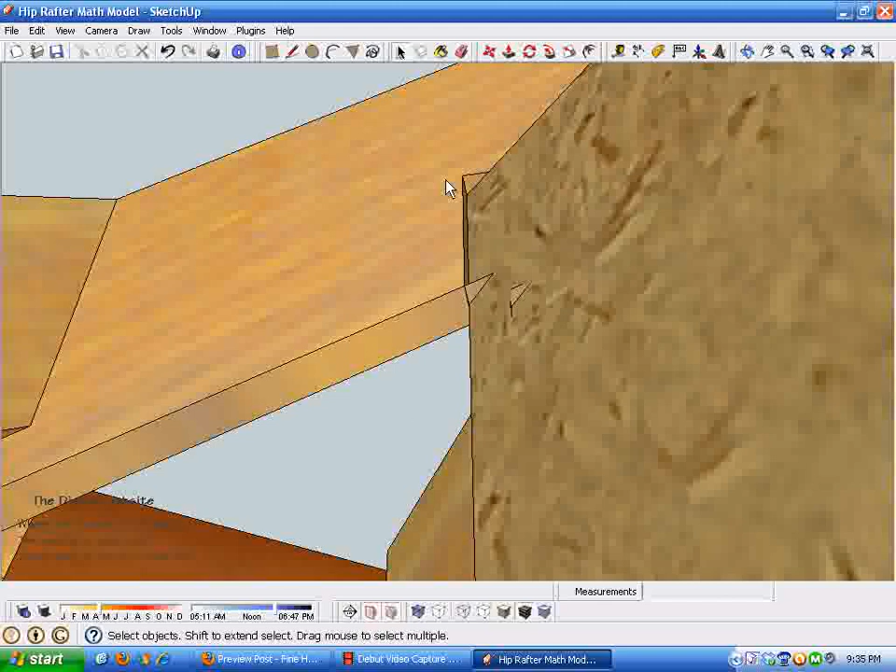But this is typically how you'd cut a hip rafter, with just a bevel on the end for the fascia to meet, and then the bird's mouth is just cut out square. Let me zoom in here. Sorry about all the flashing there, but you can just see how the typical rafter isn't framed to that precision. And when you're cutting, this surface normally gets cut back an extra quarter or half an inch so you don't have to fight a little bump in the sheathing.

But those are the things I wanted to show about hip rafters and their geometry, how these parts are all interrelated. I hope I've covered everything there about dropping the hip and those sorts of things.

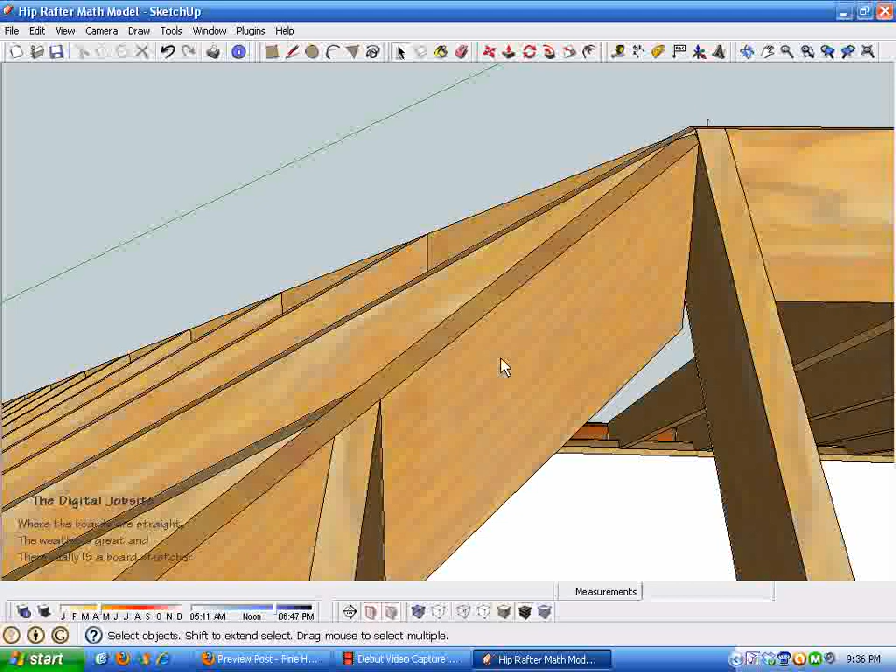Maybe I'll do this one more time with the roof planes out of there. I'll show this layer—this is a conventionally cut hip rafter. If we hide that and go back to the bevel rafter, or the beveled hip, you can see how even at the jack rafters that little bevel fills in the space.

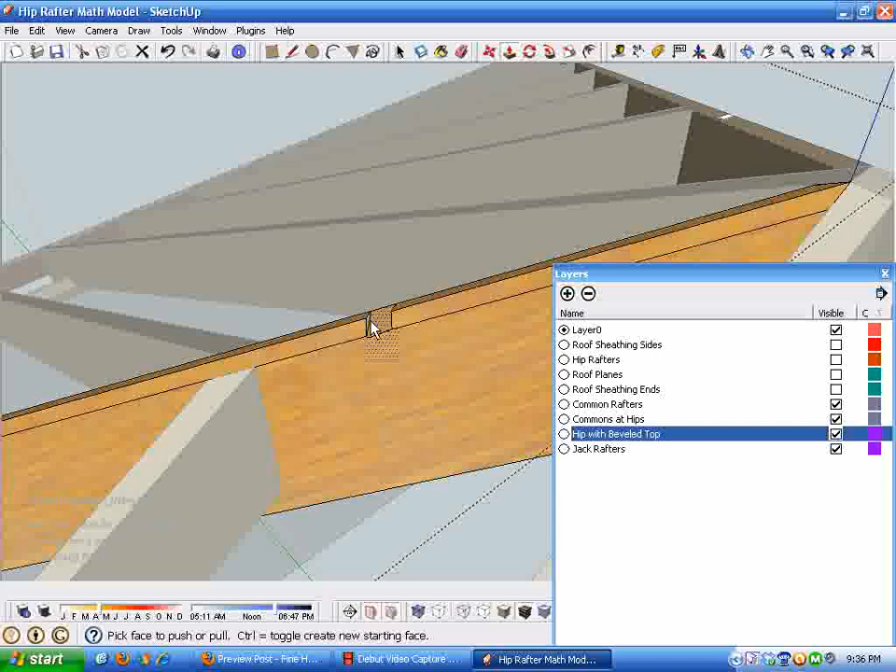By editing this component, pulling that little triangle back, you can see how much work there would be by not dropping the hip if you chose to bevel things instead.

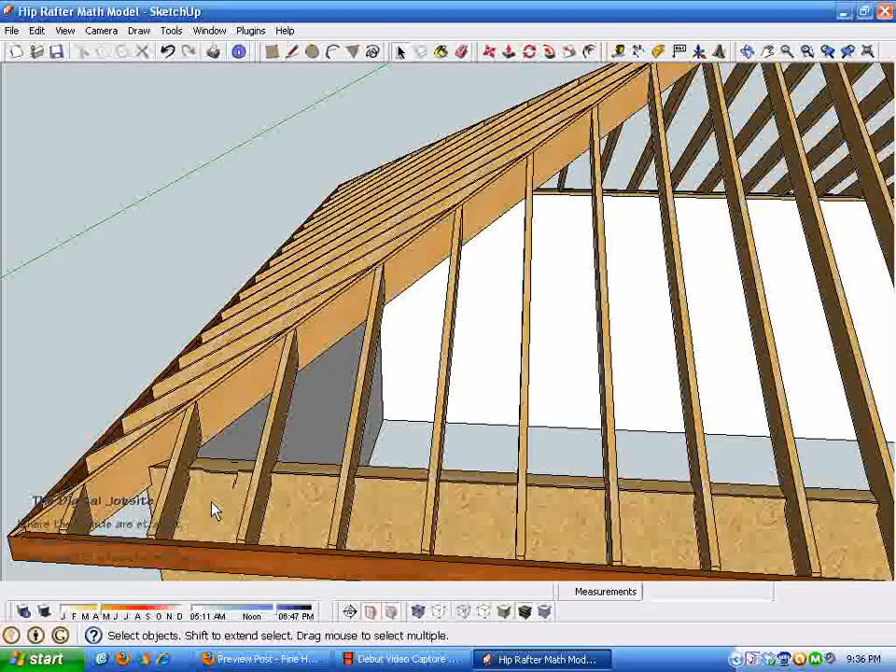But all these things come into play in the next video, when I show how I drew these components. You'll see how I work to make the heel height, which from the sheathing line—

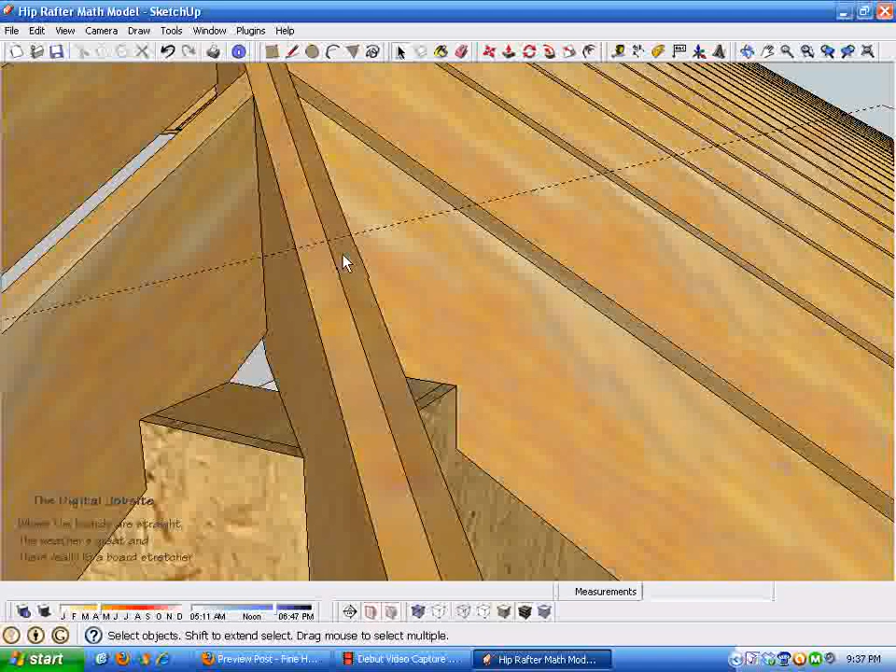the hip rafter and the common rafters have to be the same height at the heel, which you can measure at any point, but right at the outside of this wall sheathing, the height of the hip rafter from the top of that wall plate to the corner of the hip has to be the same.

If I go and hide the bevel top hip rafters and put back in the regular hip rafters, you'll see that that line hits just the corner of the hip instead of following the bevel.

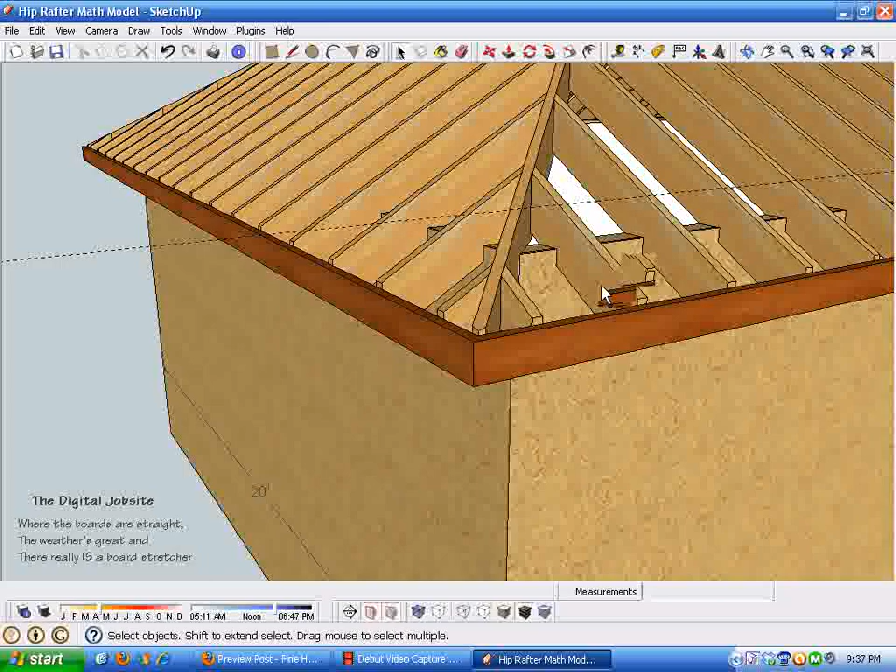So with that, I hope I haven't made you too dizzy with all the orbiting around, but I hope that explains some of the things about hip rafter geometry when I do the other videos and show how to draw these components. The third video will be how to use these drawings to measure and lay out for actually cutting rafters, and I hope that'll fill in some more information.